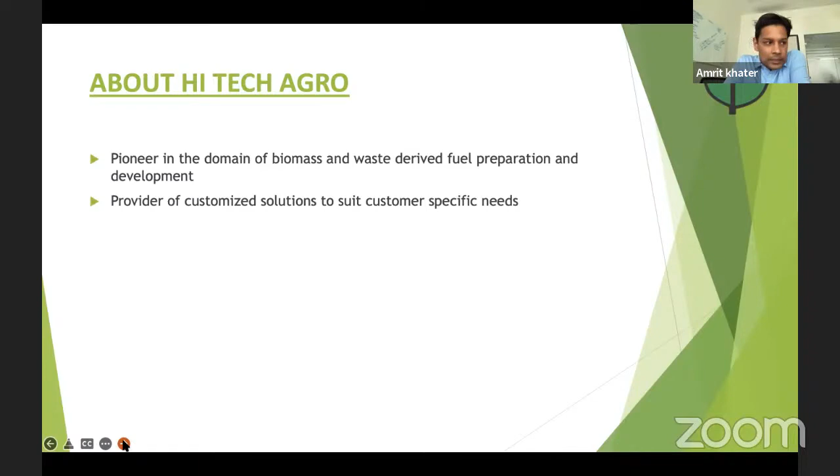From 1997 onwards, we started supplying these machineries across different parts of India, starting with Punjab, Rajasthan, Gujarat, then South India. And all these were customized because there were specific client needs. There were no standardized norms in the industry. Some people wanted smaller scale machineries. Some had larger residue generation themselves and were looking at larger capacity plants, more integrated solutions. So that is how we started the journey of providing integrated turnkey solutions.

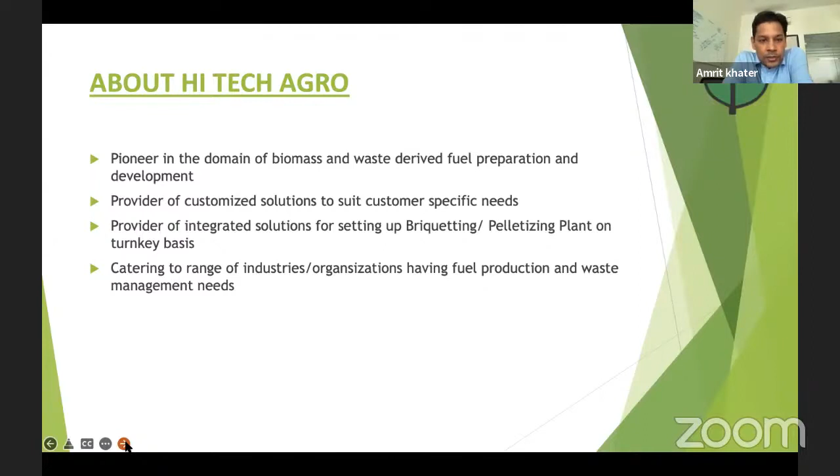And not only individual entrepreneurs, of late we have also had FPOs, the farmer producer organizations themselves, who want to utilize their own residues, be it cotton stalks, be it pine needles in Uttarakhand, be it bamboo plantations in the Northeast. And we have been providing solutions to all these sectors.

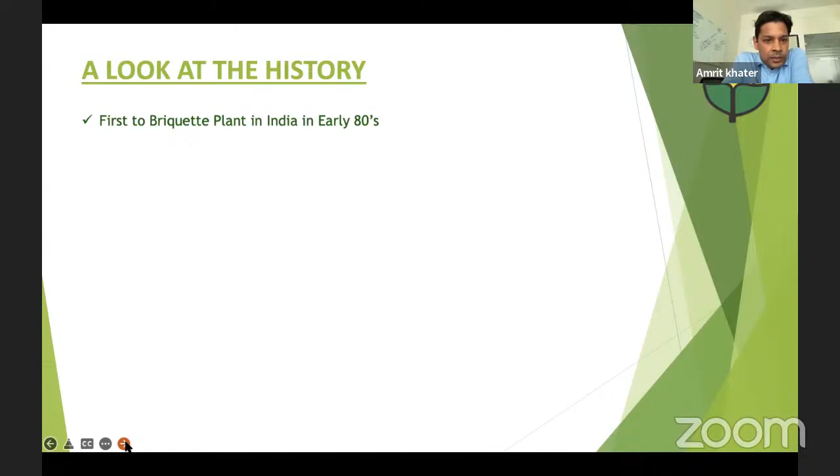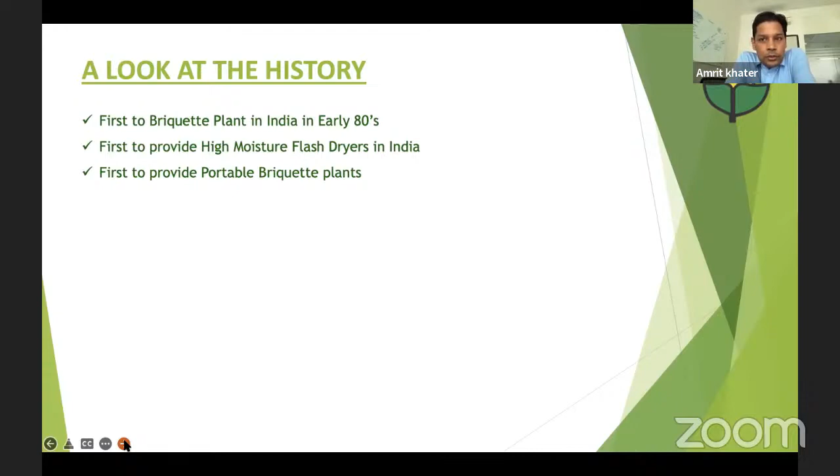So just a short look at the history. In the early 1980s, the first plants were set up. We developed flash dryers to suit the first material used, sawdust. And then we also developed portable briquetting plants because there was interest from a couple of agricultural universities in the South, which were of the opinion that instead of getting the biomass to the plant, we should take the plant itself to the farms so that we can make the briquettes or pellets there itself.

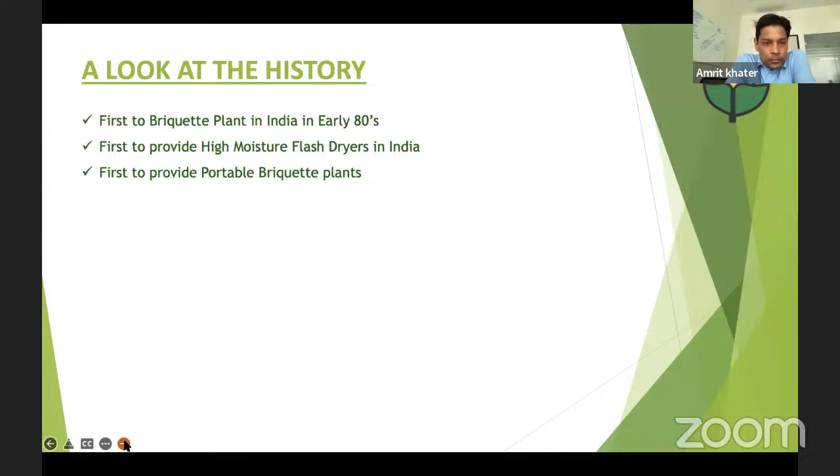And then just transport the end fuel to the consumer. So that was one of the very important developments that we had.

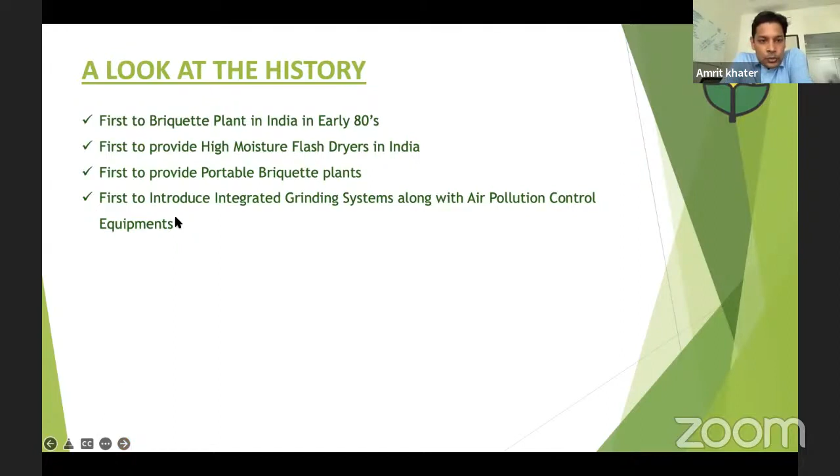Of late, as Dr. Dhamija was mentioning, the air pollution, the importance of air pollution. So with the changing norms, there was a need which arose for having air pollution control equipment, which has now become an integral part of the systems of the solutions. But till a couple of years back, in the briquetting and biomass industry in general, this was not something which was actually very relevant or present. So this was something that we introduced.

Again, for pelletizing, apart from the normal pelletizing for fuel, pelletizing of a lot of materials is done for different food products also. So we introduced the temperature controlled pelletizing for food grade items.

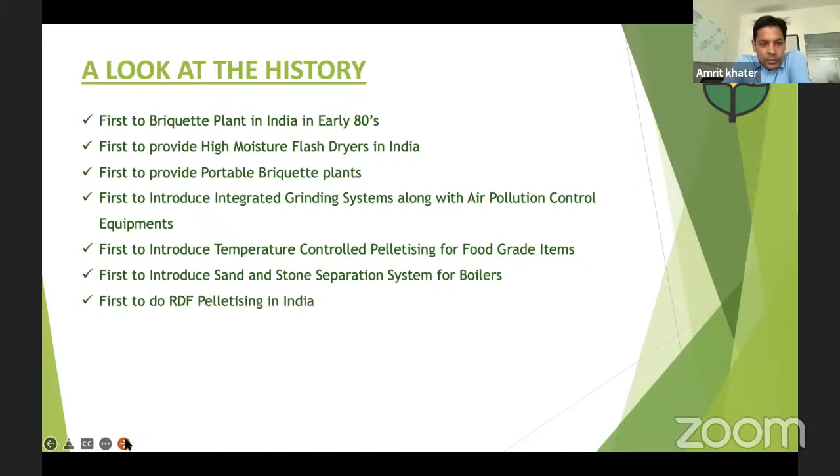The biomass usage increased over the years, and people started using biomass directly in their boilers, and a very strong need came up for systems to remove the impurities from biomass, because biomass as it comes from the fields will have impurities, sand, stones, and the boilers which are to run continuously round the clock were facing high downtimes, and this was something that we introduced to suit their requirements. Then RDF pelletizing was again something that we did.

Paddy straw stubble burning was a major concern in Punjab, and the first couple of projects for paddy straw pelleting and briquetting in Punjab were done by us. 100% pine needle pelletizing. Pine needle again happens to be a major cause of forest fires in the hills, and this project was done with an FPO and the first of its kind all across the world, wherein we are actually pelletizing on the hills itself, 100% pine needles without any use of binders, and the fuel is actually sent downhill for consumption.

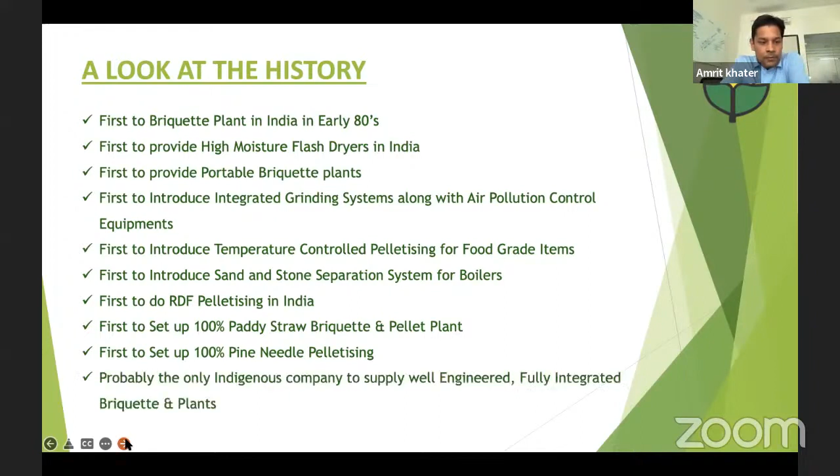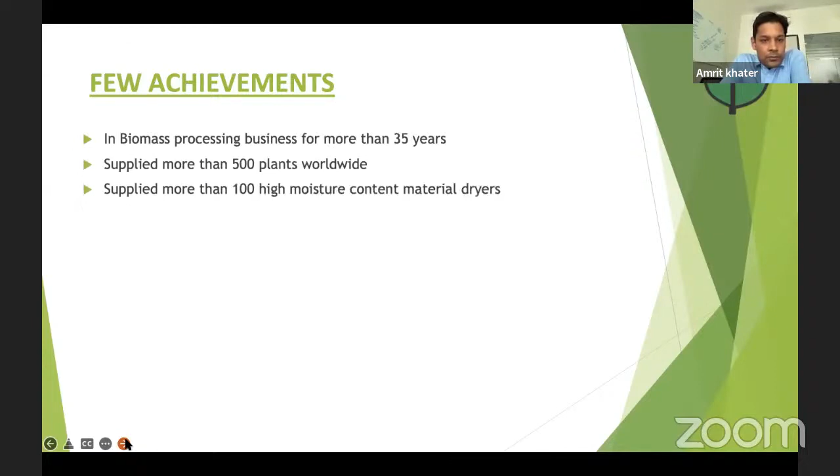So we've been in the business for more than 35 years now, supplied more than 500 plants worldwide, more than 100 dryers working, and perhaps one of the largest suppliers of integrated solutions all across the biomass domain.

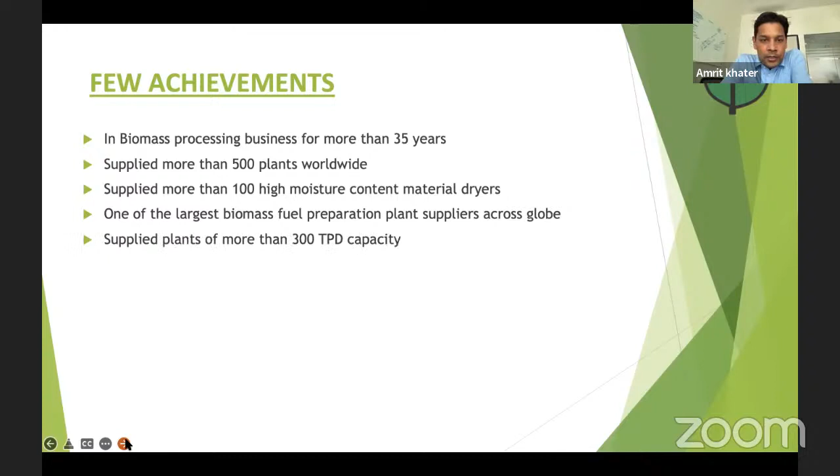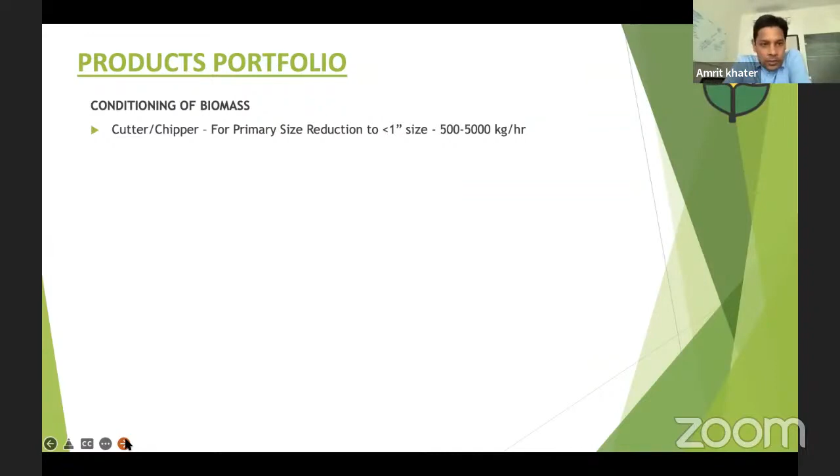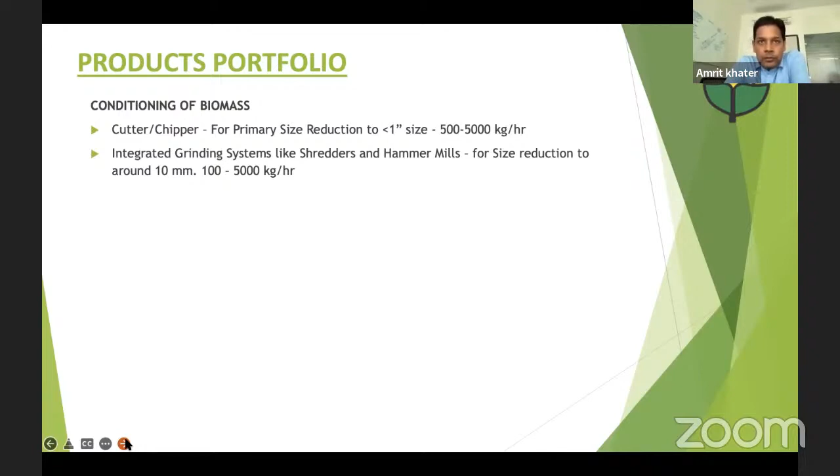So in terms of products, what we do is the conditioning of biomass. Any biomass, to process it into pellets, needs some amount of conditioning or pre-processing. So chipping or primary size reduction could be one of them. The second is the fine sizing, because to convert into pellets, you need the material to be in a small size, powdery or granular.

Then there are dryers for moisture reduction, because not all farm residues come in forms which can be directly utilized. Most of the materials have moisture levels way beyond what the pelleting, the hammer mills or the size reduction equipment can handle. So dryers are used for those. Impurity separator for the removal of sand, stone, metals from the biomass. So that is a very important equipment.

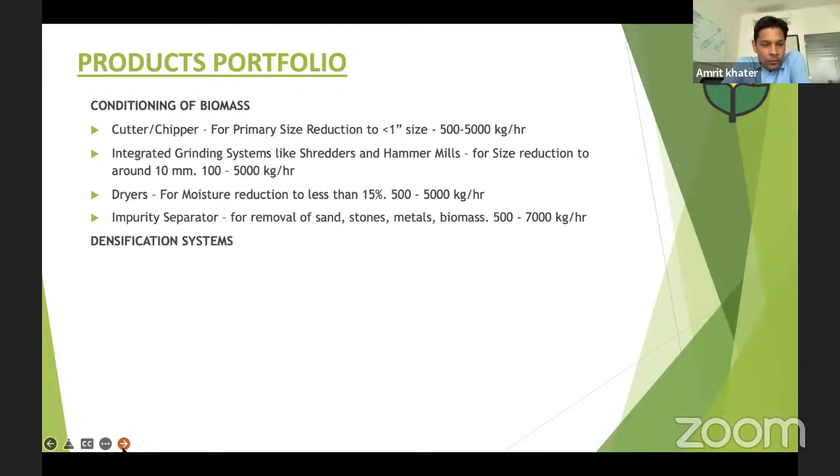Then the densification: briquetting machines, pelleting machines, material handling, all related equipment like pneumatic handling systems, belt and screw conveyors, bucket elevators. All these things are the entire range of products that we deal with, and what is required for setting up a pellet production line.

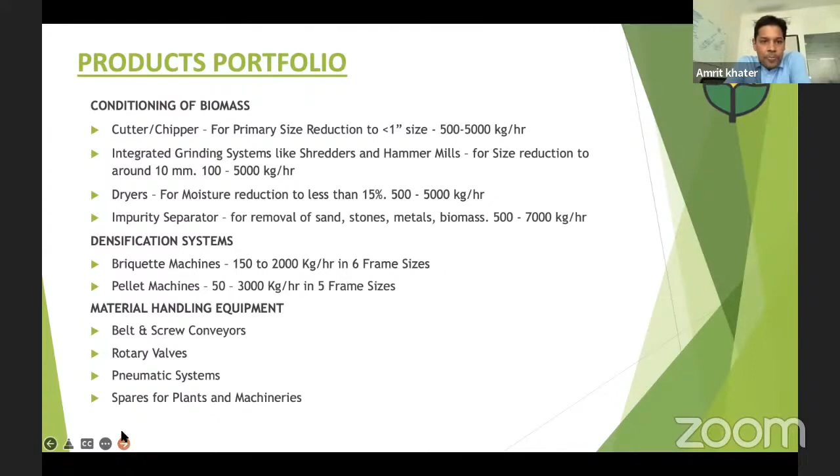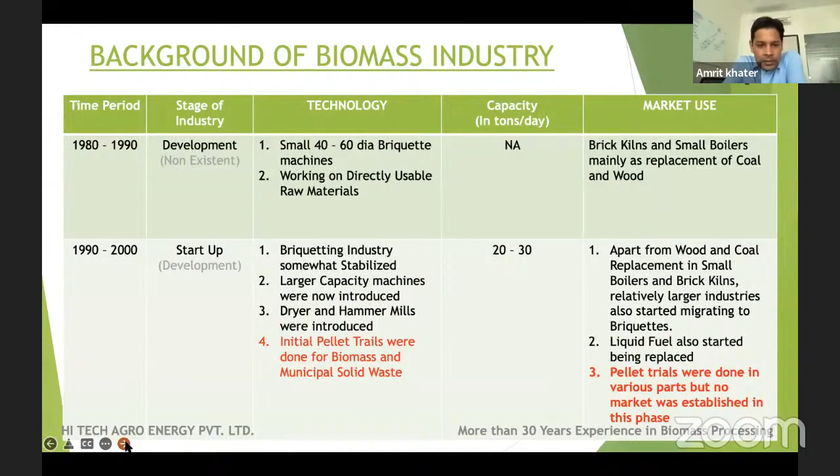Pellet trials were done, but there was no concrete market linkage that could be established in this phase. As a result, the industry did not really pick up very well during that time.

From the year 2000 to about 2016, the briquetting industry pretty much standardized. Many projects came up all across the country. Some of them were automated integrated plants working at about 30 tons, 100 tons per day capacities, most of them being small manual setups.

The range of agricultural waste which was utilized now increased. Apart from the directly usable materials like sawdust and groundnut shell, people also started going into other materials like cotton stalks and soybean husk, which were not as easy to process, but with the development of pre-processing technologies, these started taking place. Pellets also gained momentum, and a number of sawdust plants based on foreign technologies were set up.

The primary market that the sawdust pellets addressed was appliances, like pellet burners and pellet stoves in small industry, which were directly replacing liquid fossil fuels and provided a significant cost saving. As a result, this really gained momentum.

Also, the pharma and FMCG companies, mostly all MNCs, started exploring the use of biomass, and by the end of this phase gradually started shifting to biomass as and where they found assured market linkages for briquette and pellet supply. Apart from sawdust, the biomass pellet industry did not really start, because there were few off-takers of pellets, and no real long-term linkages were found even till this stage.

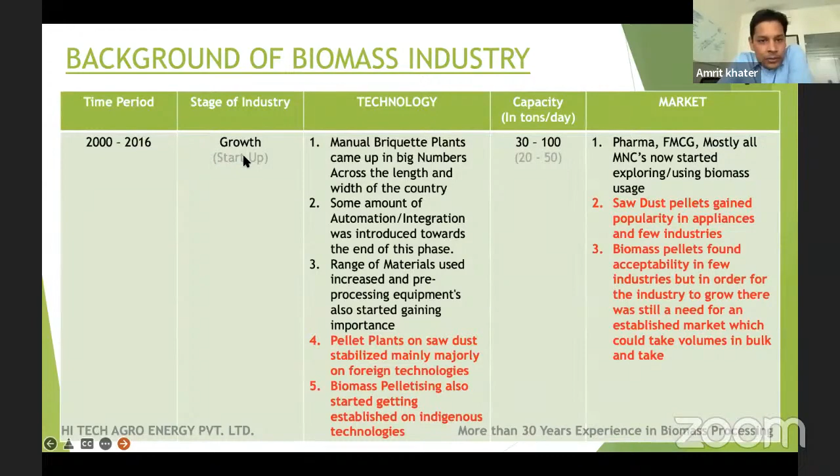Currently, in the stage we are in, briquetting is fairly streamlined. Integrated automated setups are coming up all across the country. Pre-processing in terms of cleaning, sizing and drying across all materials has been pretty much streamlined and has become a routine affair now. The pharma and FMCG companies, mostly all MNCs, still continue to use biomass briquettes and pellets. In fact, the few companies which are not on biomass till now are also trying to get there, as long as they can find the fuel linkages.

Biomass pellet plants based on indigenous technologies started getting established in this phase, and a good number of plants came up. With government policies and increasing awareness, organizations like NTPC and state-owned power plants, Reliance, Godrej and many corporates coming into the biomass sector have created huge traction, and many plants are now coming up in the biomass sector as well, and sawdust appliances obviously continue.

So probably a couple of years down the line, what we are looking at is a very established and standardized market with long-term offtake contracts, and also contracts for back-end integration in order to source the raw material and work sustainably in the sector.

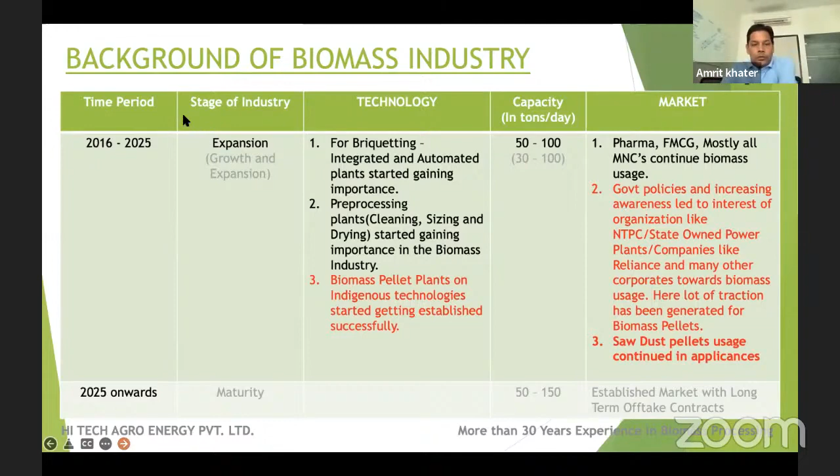So what all can be used for pellet production? Almost any biomass, any agri residue that you can think of can be used. Starting right from sawdust and sanding dust to wood chips and shavings, these being the woody biomasses. Moving on to pine needles, juliflora, wild grasses, lantana, shrubs, bamboo chips, bagasse, sugarcane trash, press mud,

coir dust, all husks primarily, rice husk, coffee, sunflower, mustard, any husk of any agricultural commodity. Shells like groundnut, castor, almond, all stalks and straws like paddy straw, cotton stalks, mustard stalks, maize cobs. These are all the materials that can be and are being used for pellet production.

When we talk about biomass pelletizing, basically crop residues, leaving aside the wood waste, we are looking at primarily three types of waste. The first is the waste which comes from agri industries like groundnut shell, rice husk, bagasse. The usage of these materials has been fairly well standardized and has been going on for quite a number of years now.

The second is the material which comes from the farms but still passes through some process like threshers, like soya, mustard, tur dal. The waste coming from these materials is also being processed in the country as of now.

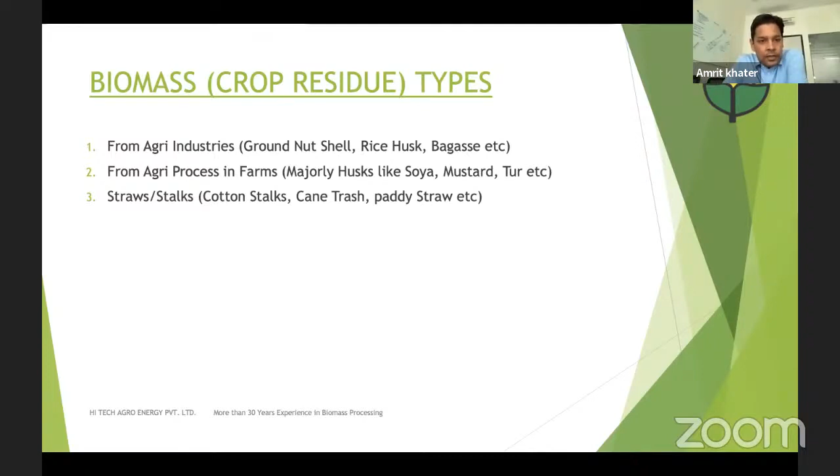The third, and in terms of quantum the most widely unutilized waste and the major cause of the farm fires and the pollution arising due to it, are materials like cotton stalk, cane trash and paddy straw, which are basically left in the field, which did not have a great market till now and were not being utilized.

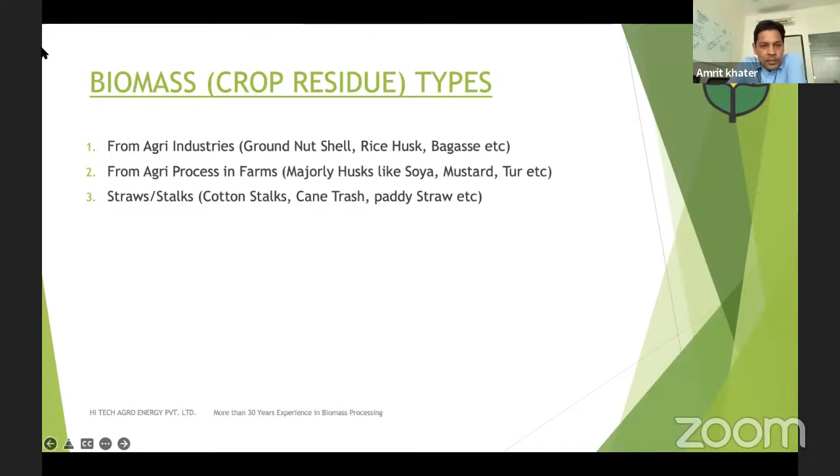So for any production plant to be set up, the step before that is obviously biomass collection. So just a brief on the biomass collection. The first two categories are wastes which are available in readily handleable form, which can be just loaded onto a trolley or a truck and brought to the plant for processing. These straws and stalks, which will be forming the major chunk of material going into pelletizing in the years to come, need a collection system to be established.

These are mostly collected through baling, and a few materials like cotton stalks are done through online chipping in the farms. In the case of baling, we get small square bales weighing about 15-20 kgs. And for larger farms and completely mechanized systems, there are round bales weighing about 600, 700, 800 kgs, which can be collected.

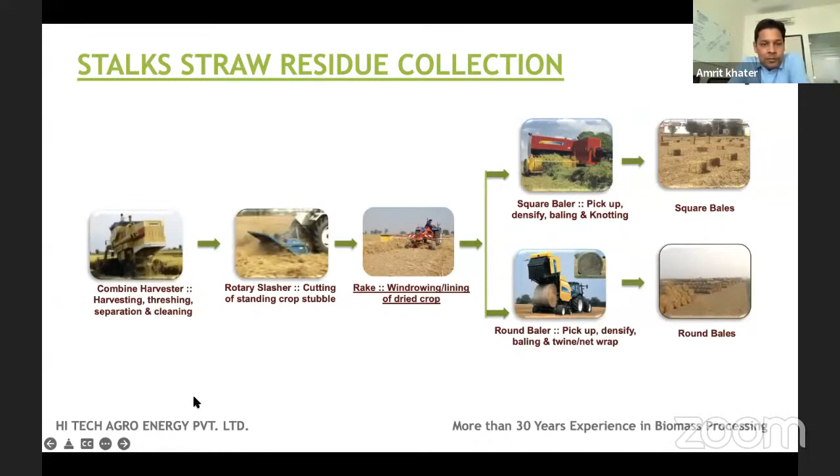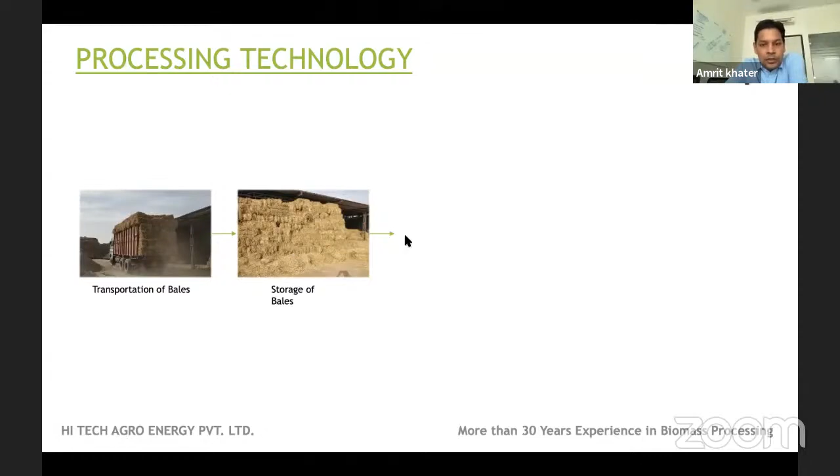So coming to the processing technology for production. Once we have the material, it could be bales or it could be chipped cotton stalks or any other chipped biomass, we look at primary sizing. Primary sizing basically converts the material into a form wherein it can be handled in a mechanized way. There is no need for any manual intervention subsequent to that.

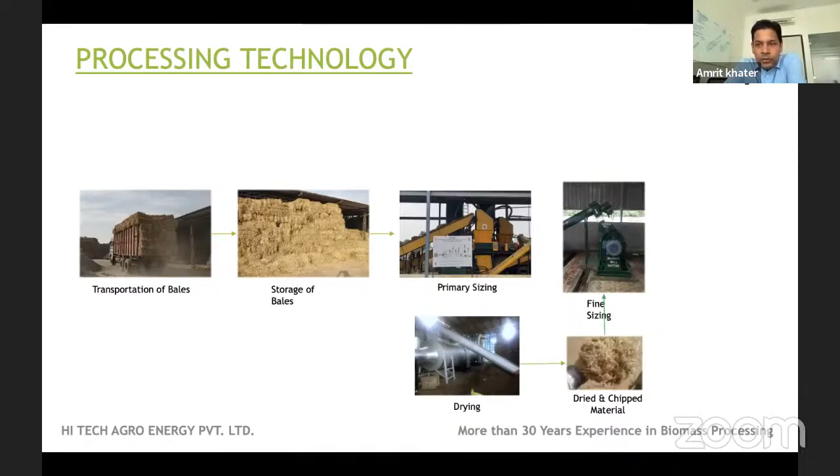From here, if the moisture levels are high, it goes through a drying process. Then further to fine sizing, to convert it from say a 1 to 2 inch size to a less than 5-6 millimeter size, to ensure that it is in a pelletable form. This then further moves to pelleting, and the pellets are made.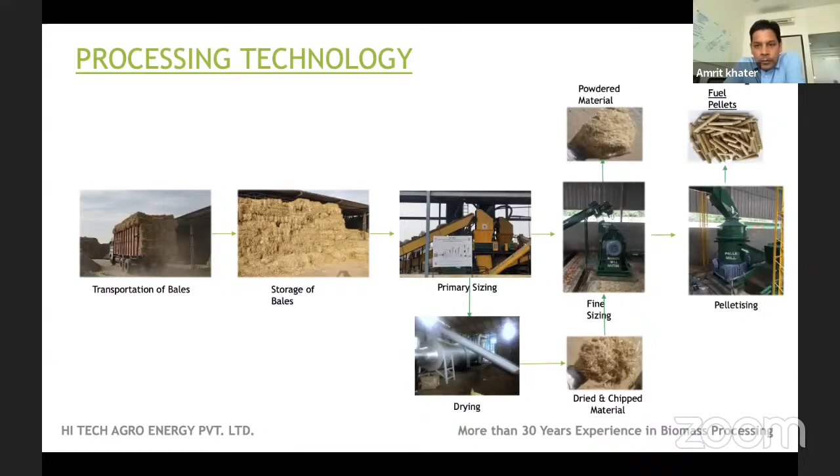So this is a typical layout for a process flow for biomass pellet production. You feed the biomass onto a moving conveyor. It goes to a shredder where the sizes are reduced to nearly less than 1 inch. From there, if the material is moist, it moves on to a drying process. The dried material then goes to further size reduction in the hammer mills, and from here on into the pelleting line.

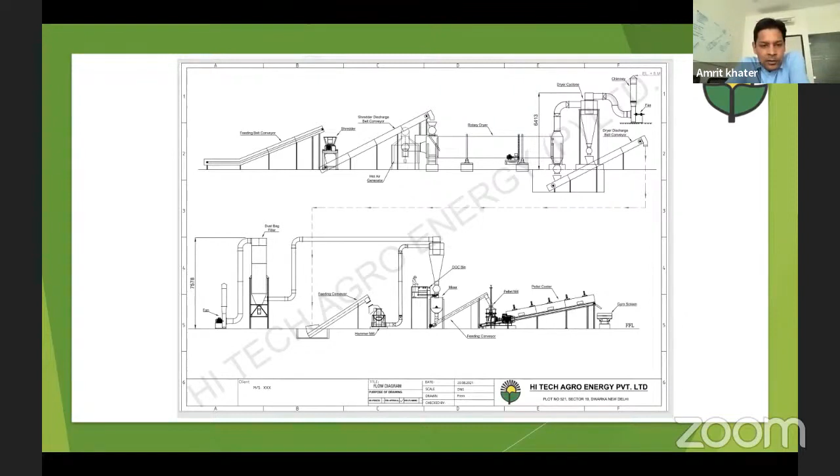Dust bag filters are installed at all relevant places wherever there is dust generation and a chance of dust-laden air going into the atmosphere. So a short video on the production process is now being played.

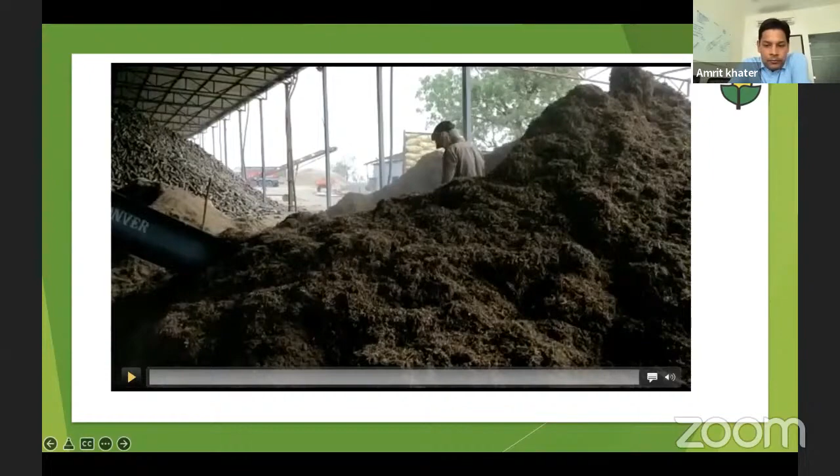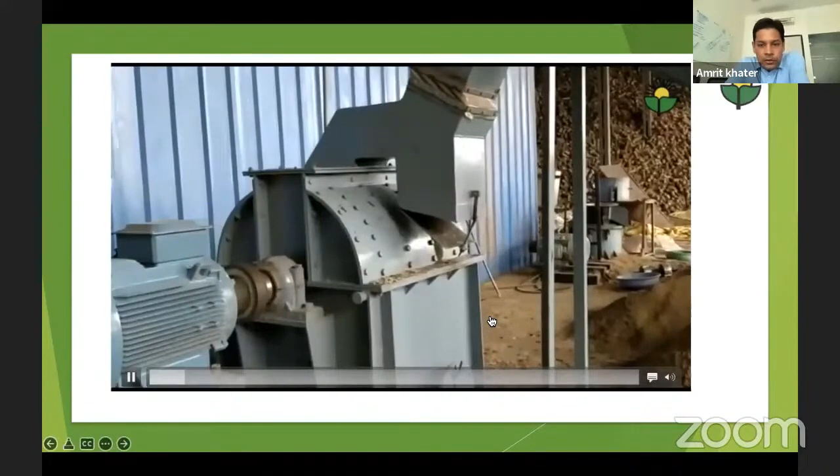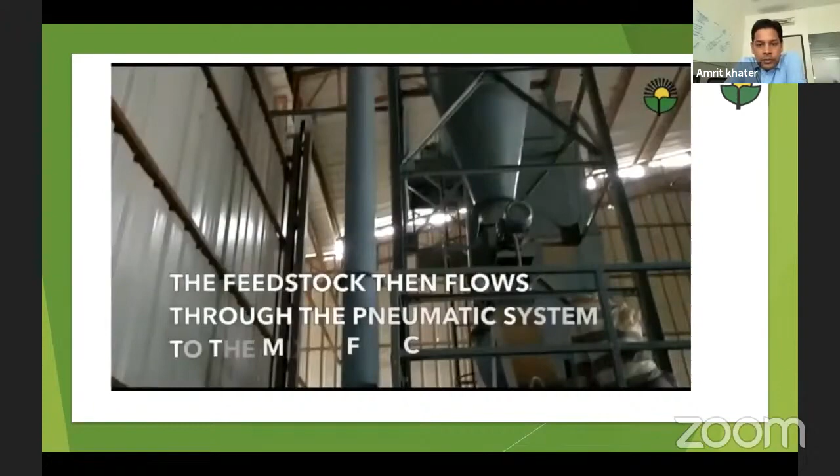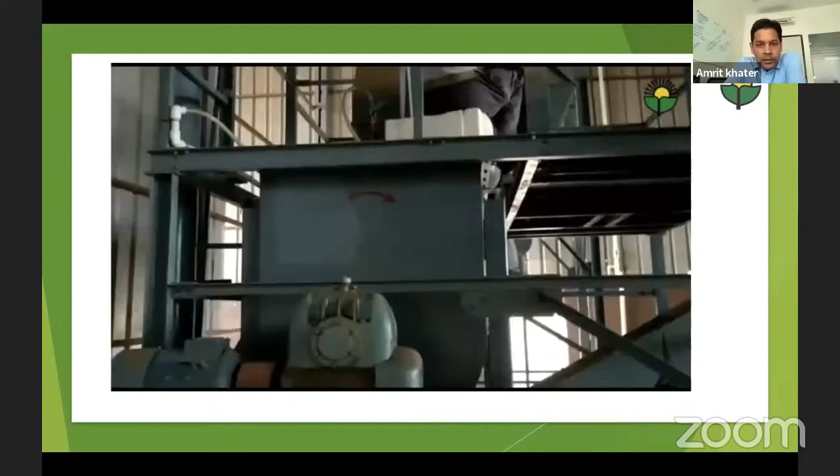So the separation of stones, sand, and any other metallic impurities, if they are part of the biomass, happens at the first stage. The crushed material then goes into the mixer, where if required, the addition of water happens and moisture uniformity is created, and it acts as a buffer. The dust-laden air goes into the bag filter.

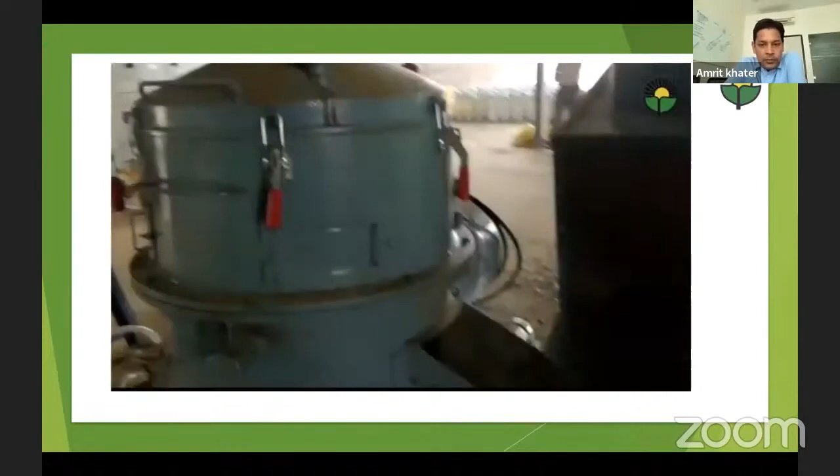The conditioned material from the mixer is fed to the pellet press. The pellets formed are quite hot, at about 80-85 degrees centigrade, and are cooled and dried and then sent for further storage.

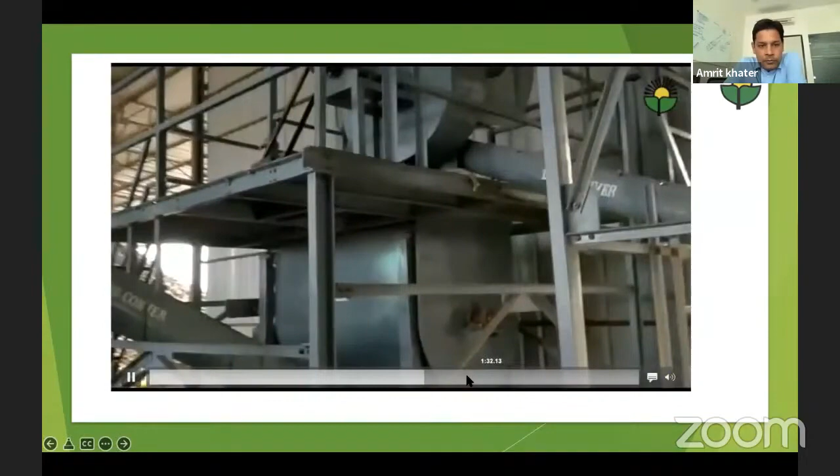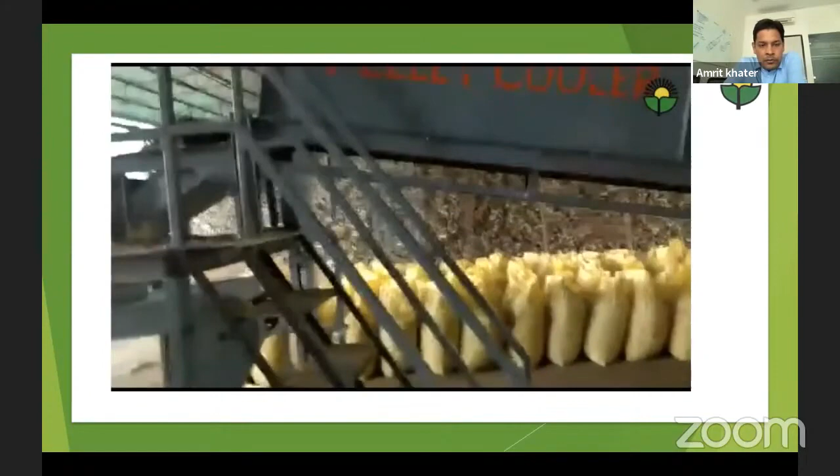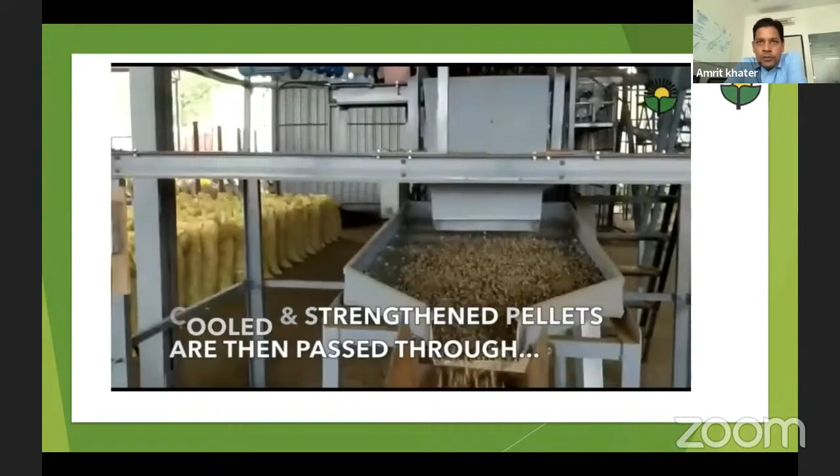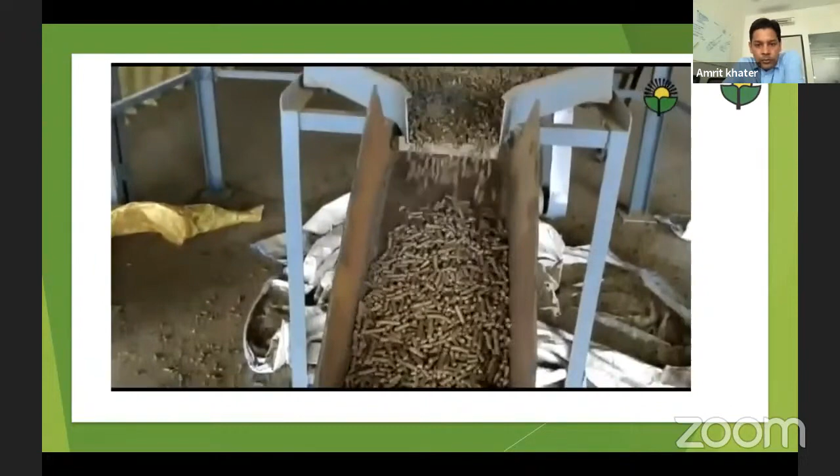So in case of the material going to smaller industries or appliances, the pellets could be packed in bags. In case of bulk consumers, like power plants, it needs to be sent in loose open condition, just open pellets loaded onto the truck.

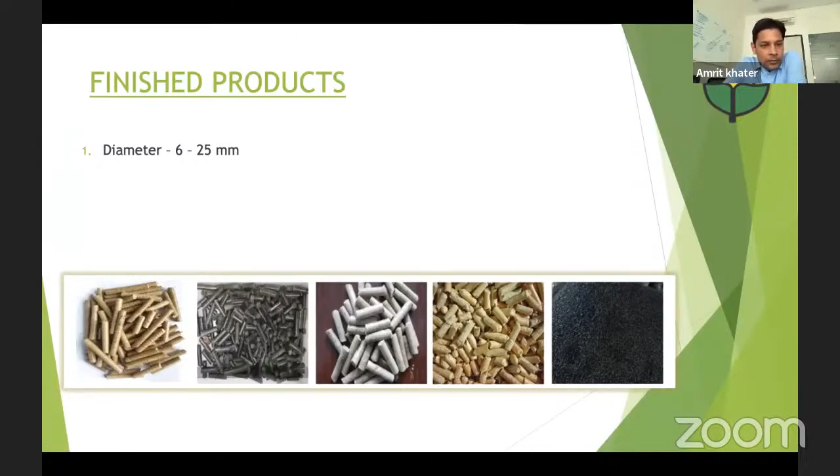So the finished product pellets, just a few pictures of different pellets from different materials. The diameter typically ranges between 6 to 25 millimeters, length 20 to 40 mm, moisture levels less than 14%, calorific values as per the raw material, mostly in the range of about 3,500 to 4,000 kilocalories.

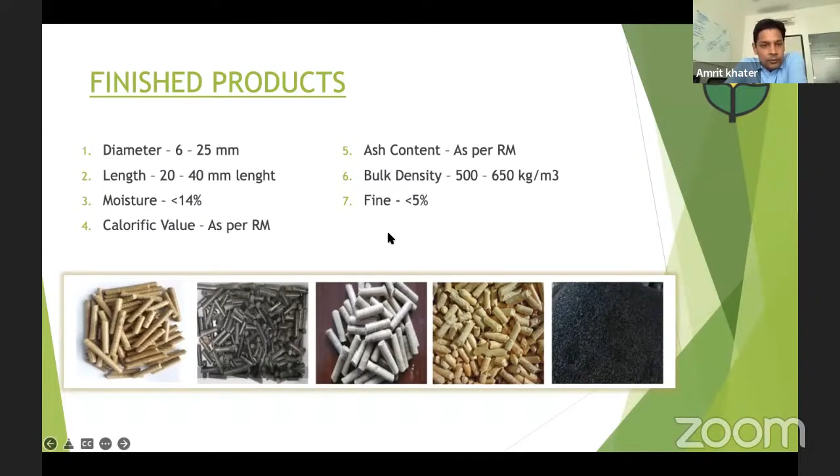Ash content, again, as per the raw materials, mostly what is preferred is less than 10%. Densities ranging from 500 to 650 kg per meter cube, and fines generation of less than 5%. So this is what typical pellet specs would be for pellets made from agri residue.

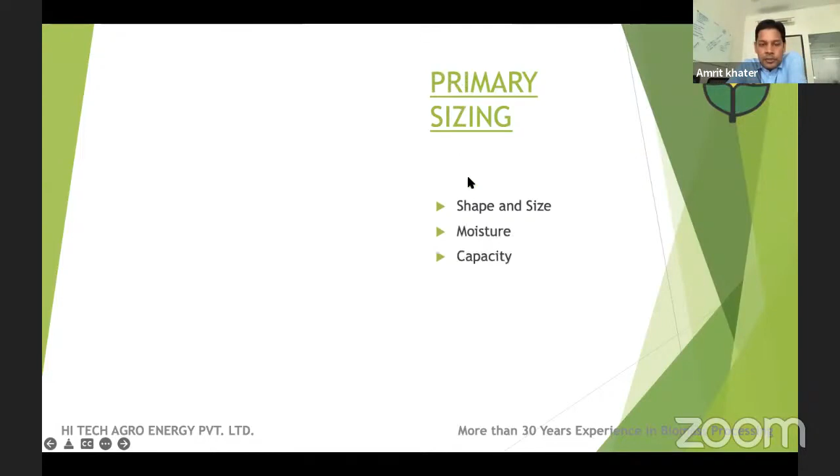So there are multiple ways the processing could be done for production. The first stage, primary sizing: the selection of equipment would depend on the shape and size of the material, the moisture levels, the capacities desired, and the material texture, whether woody or fibrous. So multiple solutions.

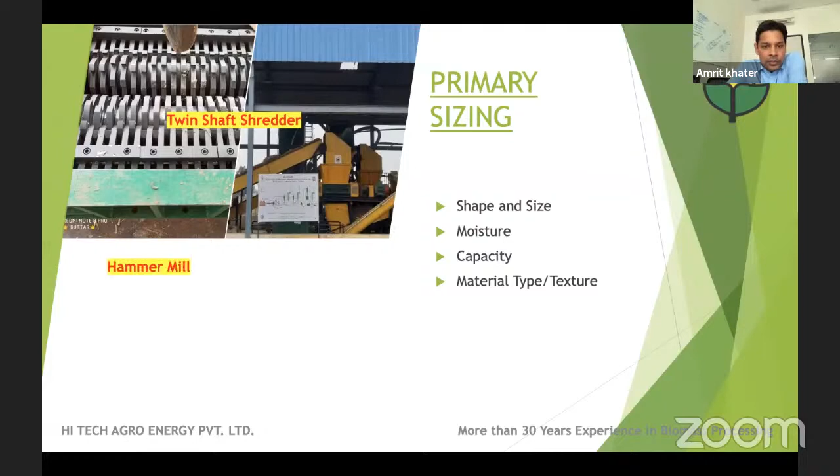Twin shaft shredders are one of the solutions available for primary sizing, more suited for larger capacity plants and materials with any moisture level. Hammer mill type systems are suited more for smaller capacity and dry materials. Drum chippers are more relevant for woody biomasses, with or without moisture.

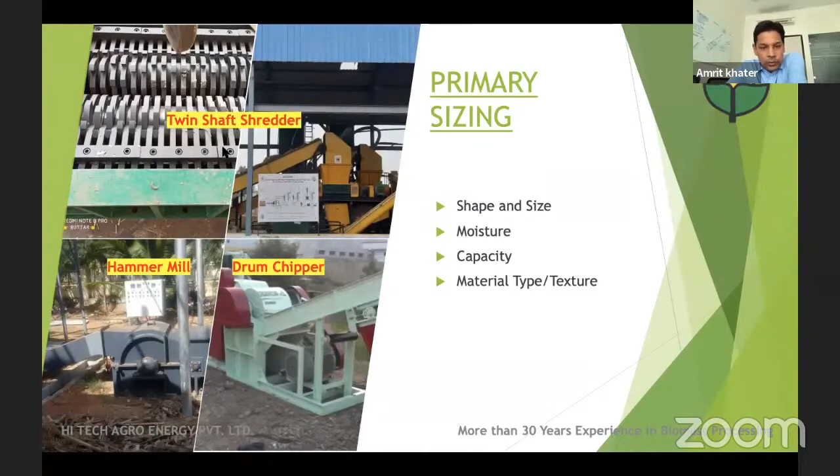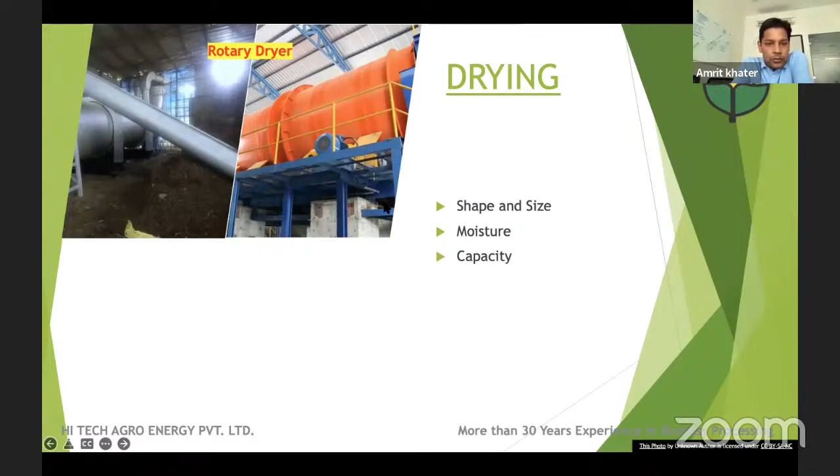For drying, again, the shape, size, moisture, and capacities are what is important. For larger capacity plants, 50 tons, 100 tons per day, normally rotary dryers are used. For low moisture materials and relatively lower capacities, flash dryers are being used.

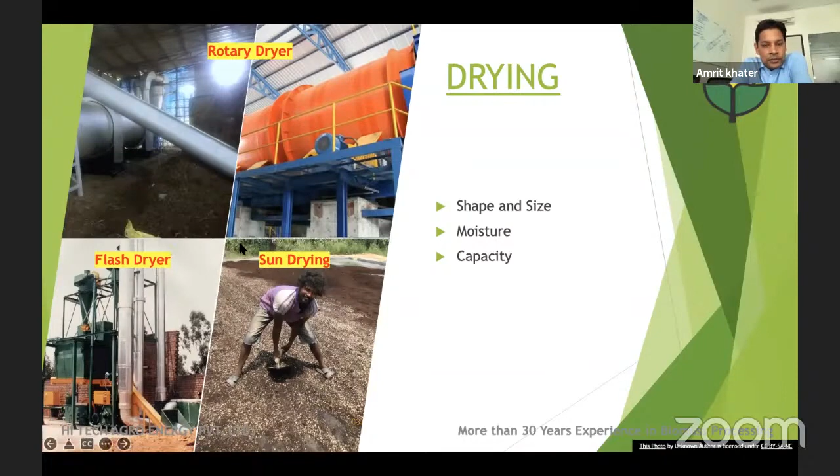And then sun drying happens to still be the cheapest form of drying for places like Gujarat, Rajasthan, Haryana, where there is ample sunlight available. So sun drying still happens to be one of the cheapest and most economical ways for smaller capacity plants.

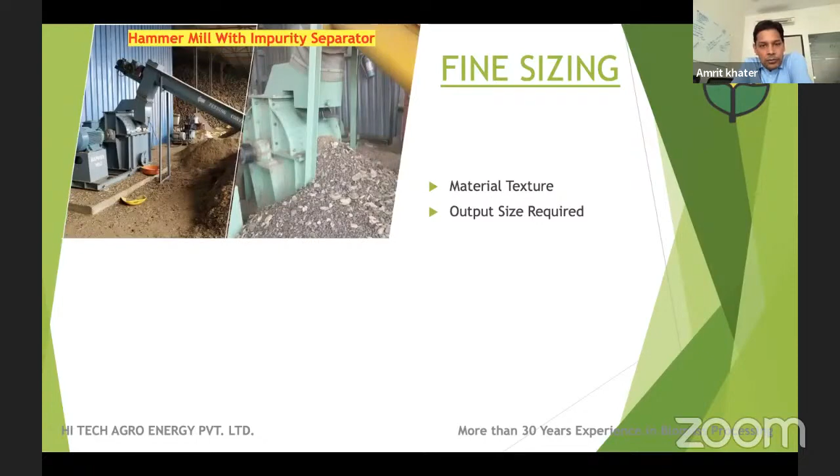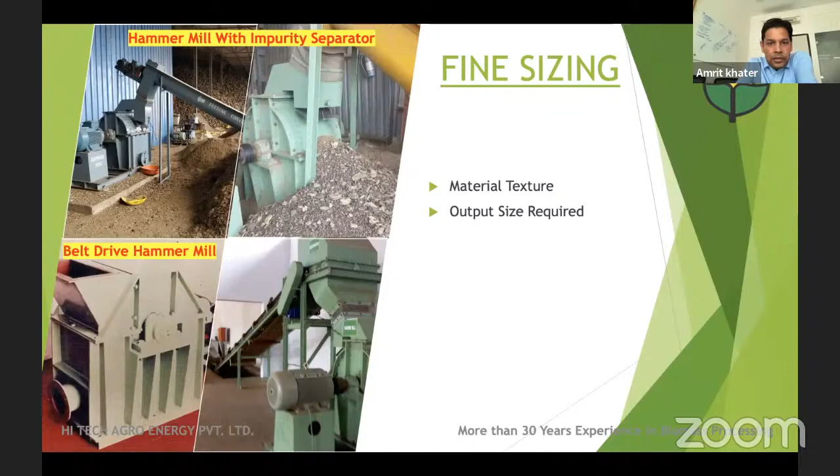For fine sizing, we have different kinds of hammer mills: low speed, high speed, directly coupled, belt drives. So based on what kind of material type we are looking at, whether it is brittle or fibrous, and what kind of capacities we are looking at, the different kinds of fine sizing equipment are selected.

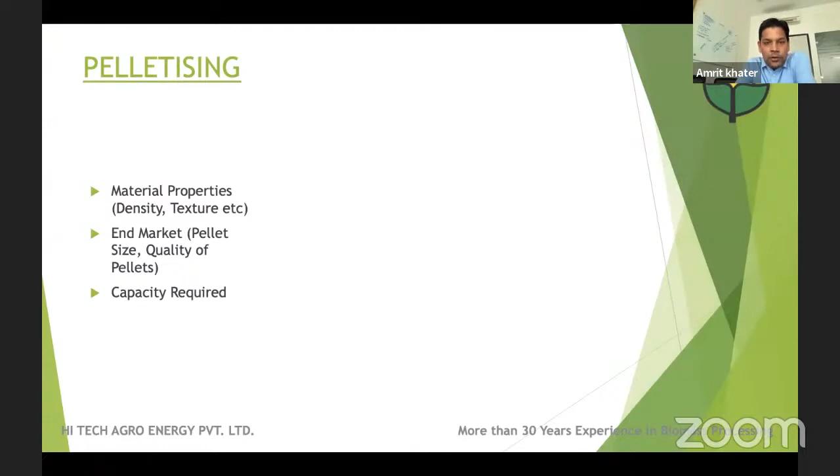Pelletizing wise, it's in terms of capacity, end market, and material. So apart from the material properties, the end market also plays a very important role in deciding what kind of pellet press should be installed. So if you're looking at something like appliances and wanting to produce 6 mm pellets from the most woody kind of biomass, then we are probably looking at a more specific ring die kind of machine being installed.

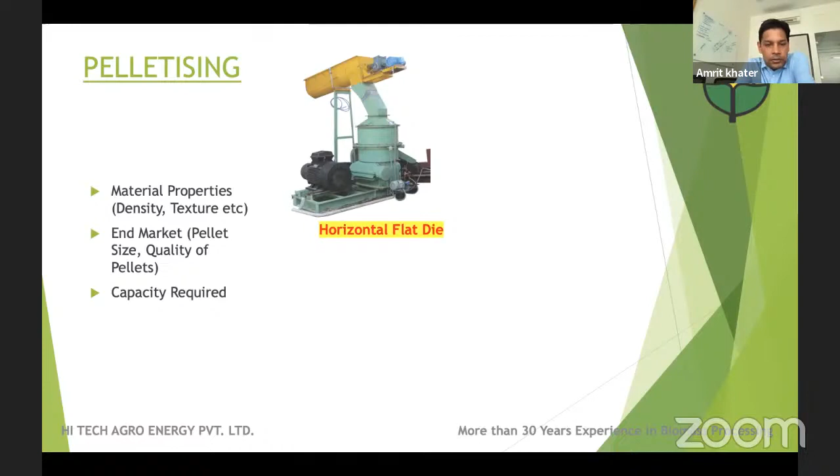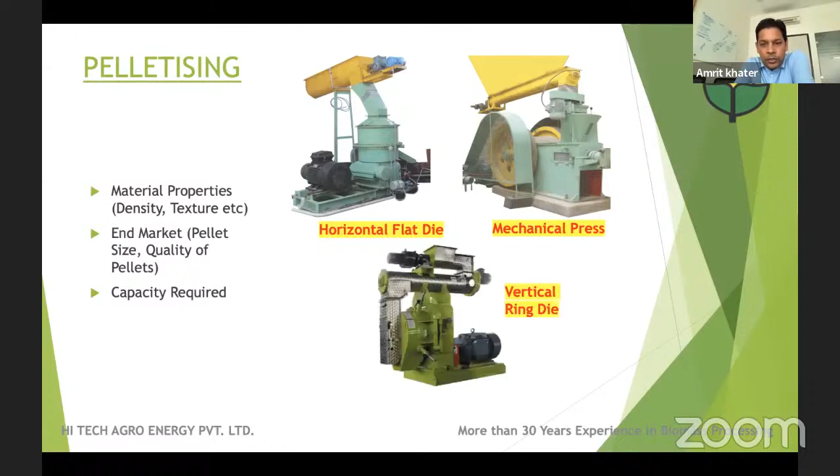If you're looking at any mix of agri residues and large capacity productions, then we are looking at vertical ring die machines. And then there are mechanical briquette presses which are modified to suit pellet making. For small or medium capacity plants, or for industries who already have a briquetting setup, the mechanical press option happens to be a good option for them to start with to explore the pellet market.

So a few other items which play an important role in the production are the air pollution control equipment. These have now become the most critical part because when you have multiple pre-processing stages, there is a lot of fine dust and a lot of fine biomass particles released into the atmosphere. And looking at the current industrial norms, it is not permissible to release those materials into the air directly. So air pollution control equipment has gained great importance now.

Material handling equipment: because the plant capacities have increased, instead of getting a readily processable material, mostly what the plants get is material which has to be pre-processed and conditioned by them to make it suitable to reach the stage of pellet making. And with larger capacity plants, manual intervention or any sort of intervention between the different processes turns out unviable and affects the quality, consistency and efficiencies of the plant. So integrated material handling equipment has become quite relevant now.

And also, as the capacities have increased, more and more automated and integrated plants have started coming up. So electrical automation and integration is also one of the very important factors to be looked at.

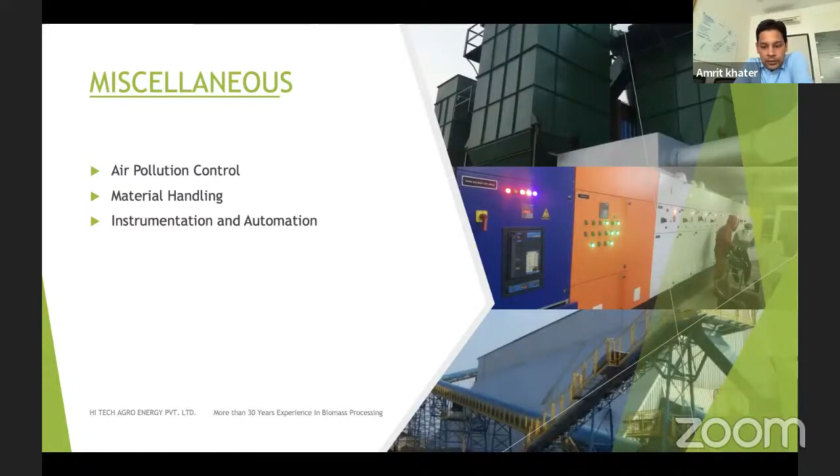So with respect to the factors, supposing someone decides to go into biomass pellet production, a few factors that need to be considered before selecting the production technology. The first is the suitability with respect to biomass. So if you're planning a plant on paddy straw as the primary fuel, your technology would be different compared to if you're looking at solid bamboo waste.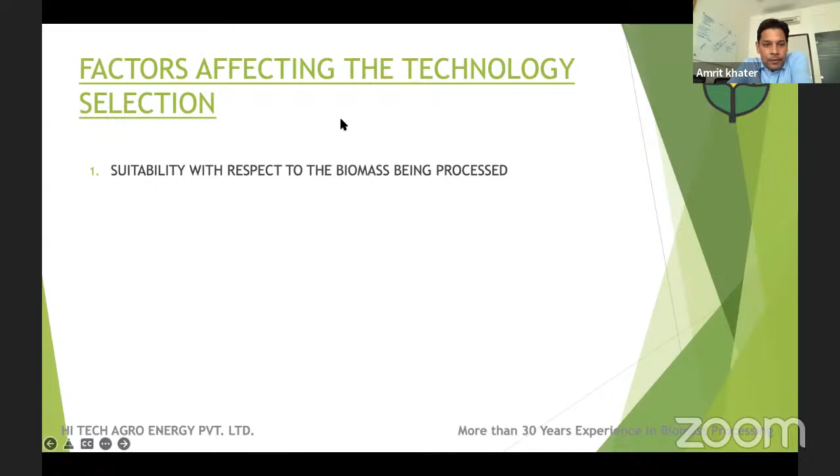The next would be the cost of capital as well as the operating cost. Many times the capital cost is lower, but the operating cost is so high that it makes the project unviable. So these two things put together should really be considered. And the availability of spares and service support.

The biomass industry all across the globe has primarily been working on standardized materials, primarily wood waste. These are materials which come in a specific shape, size, form, and condition, and you can have very large capacity plants with very minimal involvement of manpower. But in the Indian context, we are basically an agricultural country, and many agri residues have different shapes, forms, sizes, textures, properties. So local service support plays a very important role here to make the projects a success.

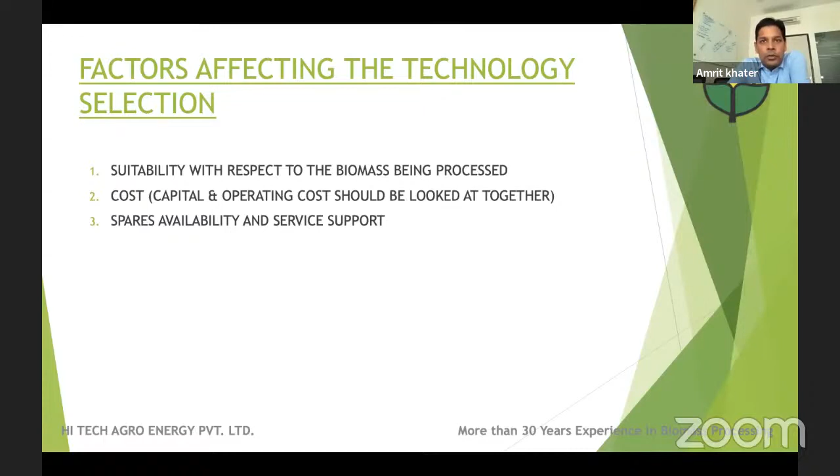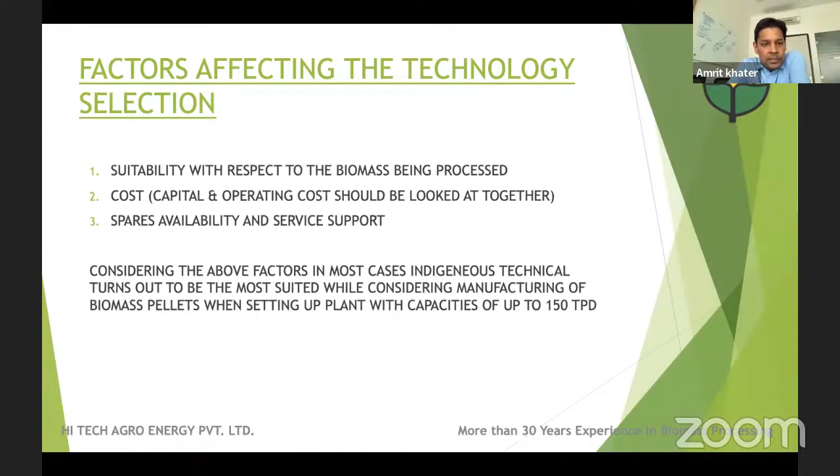So considering all the above factors, what is mostly seen is that indigenously developed technologies turn out to be the most favorable because they are more suited to the biomass materials available here. The cost of capital as well as the OPEX cost turns out to be mostly lower than the European machinery. And also the service and spare support is obviously more available.

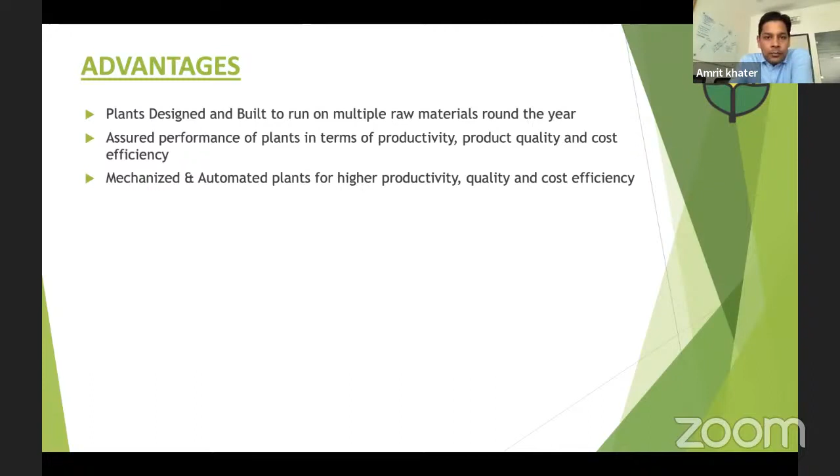So from a Hi Tech perspective, the advantages of setting up these kinds of projects would be that we design projects which can run on multiple raw materials around the year. There is assured productivity, product quality, cost efficiency. The plants are mechanized and automated, so there is limited manpower involvement and higher efficiencies of production can be assured. And there is a systematic and comprehensive approach to handing over the plants to the clients, with proper training given to the manpower.

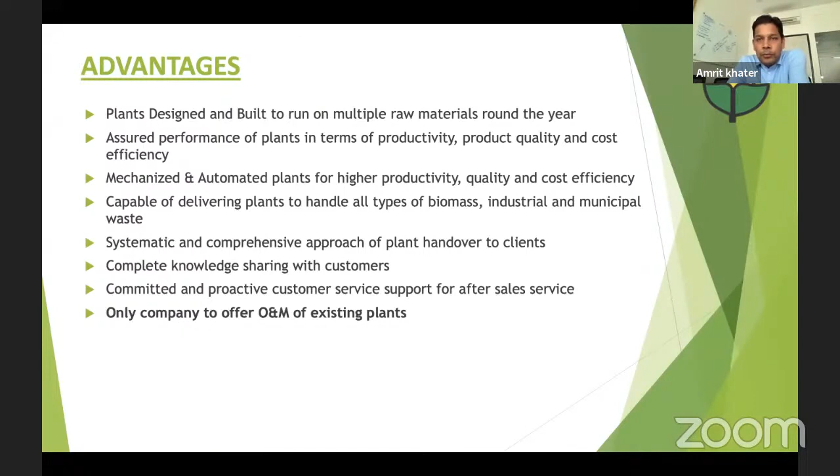And also a very important factor is the operation and maintenance of the plant. So biomass pellet production or any sort of biomass pellet or briquette production is something which till date, as Skill Council also mentioned, new courses and structures are coming up now to actually standardize the industry so that we can have trained manpower. As on date, the availability of that kind of manpower is not there. So at our end, we are trying to see that we can have at least deployment of trained manpower from our side so that the production plants do not suffer on that account.

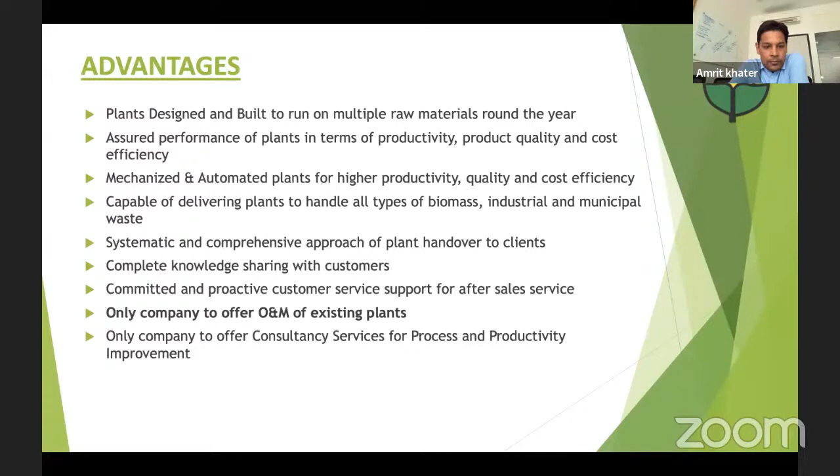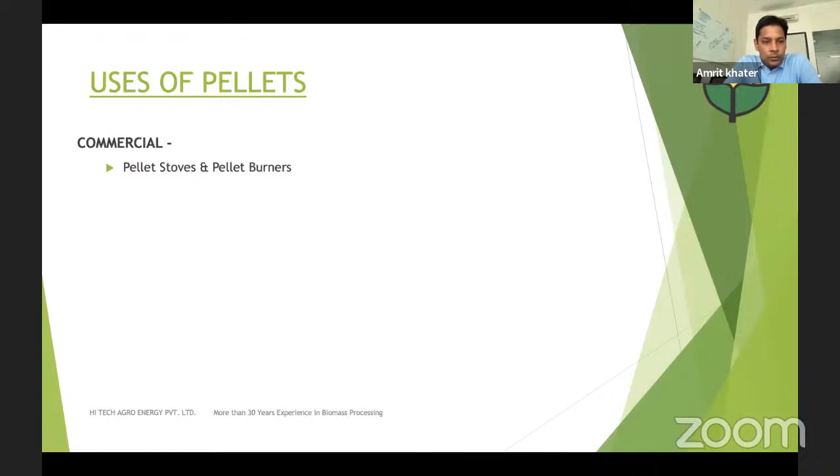So coming to the last section, the uses of pellets. They can broadly be divided into the commercial segment, which is pellet stoves and pellet burners, with premium quality pellets, mostly wood pellets, going into this segment. Then the industrial segment, which could consist of boilers, thermic fluid heaters, hot air generators; pharma, FMCGs, textiles and all other different industries would fall in this category. And the latest which has now come up is the power plants, government owned or IPPs, and they are turning out to be one of the largest consumers of pellets, basically far overtaking the first two sectors.

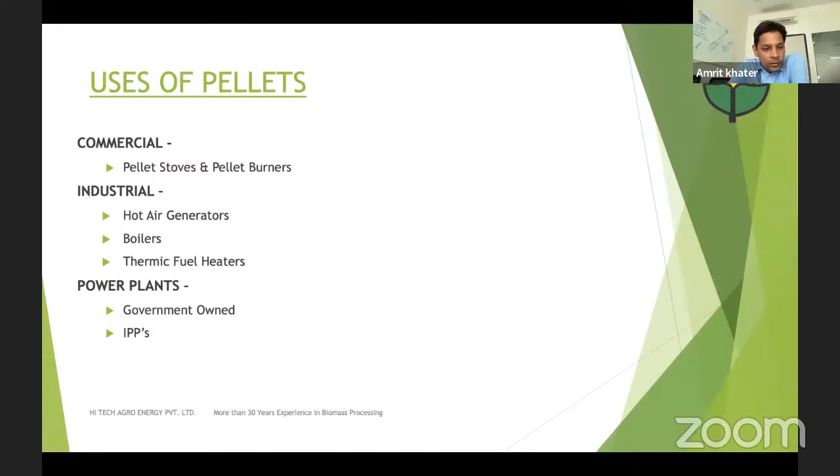Just to give you an example, the requirement of one power plant would be probably, if you club together maybe 20, 30 different industries, or maybe 200, 300 small commercial users, you would be reaching that kind of quantity the power plants would require. And if you look at the pellet specs, in the commercial segment you are looking at mainly wood-based premium quality 6 mm pellets. For the industrial segment, mostly agricultural residues and mixed waste are being used, the most common size being 8 to 10 millimeter diameter pellets. The general market acceptability would be for materials with less than 10% ash and about 3,800 odd kilocalorie minimum.

So the market has totally changed with the power plants coming into the picture, because these power plants are now open to using any and every kind of agri residue. The size limitations, which were normally 8 to 10 millimeter for smaller boilers, have now gone up to 25 millimeter, and they are open to taking material with up to 25 mm diameter. And most importantly, even low-grade fuels like paddy straw and cane trash can go into the system because they do not really have any restriction in terms of calorific value. And ash content as high as 20%, which pretty much covers the entire range of biomass. Any biomass that would be produced would be at less than 20%. So with the power plants now creating a demand, the sector is moving in a completely new direction altogether.

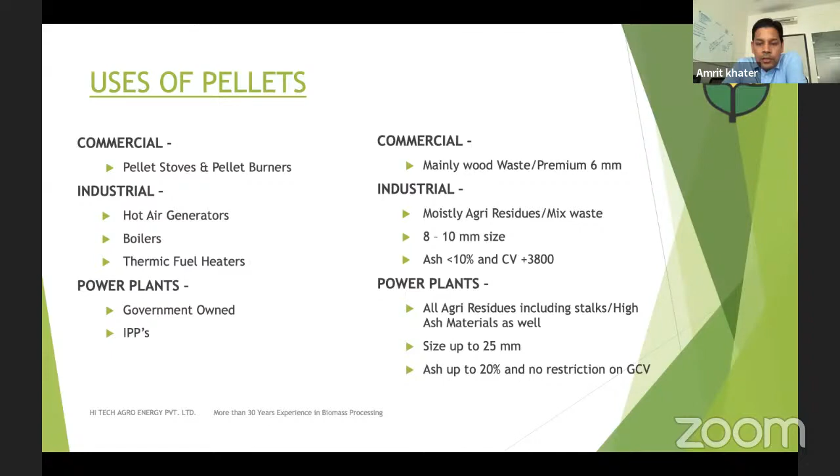So that's it from my side. I think if there are any questions, we can take them. Thank you very much, Mr. Khater. I think Dr. Srinivas has a question. Please. Can you please unmute him, Rohit? Unmuted, ma'am. Okay. Dr. Srinivas, please. Thank you, madam. Once again, you have got a very good speaker. Many congratulations to you. And Mr. Khater, I think it was a wonderful presentation. I have been in the biomass sector for a very long time, and I'm very happy to see that you have been in business and improving upon it for the last 30 years.

I have a question. You mentioned somewhere some qualities of the finished product. Is there any quality that either the client or the government, state or central, stipulates on the briquettes or the pellets? Briquettes are the larger ones, what you are mentioning, right? And pellets are essentially for stoves, etc. So are there any quality parameters? Moisture content should be this much, CV should be this much, heavy metals should be this much, varieties of things. You may be aware that there are standards for gasifiers. Only when it gives 1000 kcal per normal meter cube, if it passes, then the gasifier is certified by MNRE. This was there some years back. So there are three areas which I see where quality parameters are important.